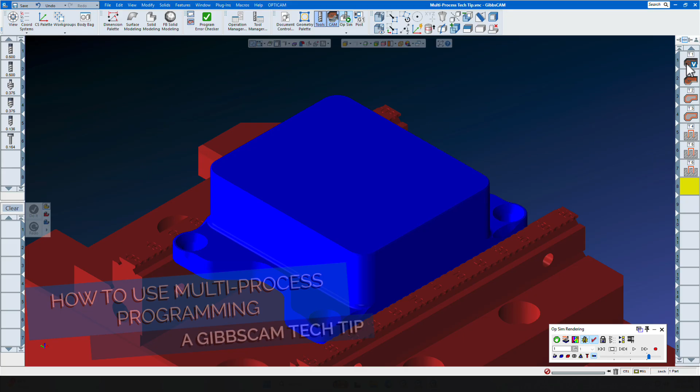In this GibbsCAM Tech Tip, we will show you how to use multi-process programming to instantly apply multiple processes to shared part geometry. It can be a time saver by only having to select the part geometry once for multiple processes. Save the processes to your library for quick recall to other part files with only minimal changes required. Let's show you how this works step by step.

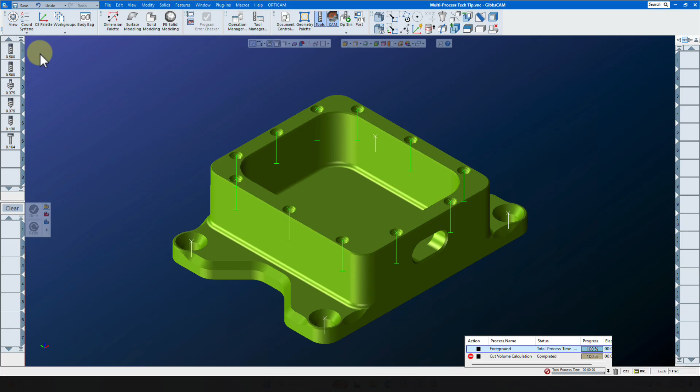We will start with an empty operation list and an empty process list, but we will stick with the tools since that's a very simple matter. Let's have a look at the tools that we're going to be using for this operation set. Number one, a 1/2 inch rougher, then a 1/2 inch finisher, a chamfer mill for the deburring. Next, we will use a spot drill, a number 29 drill, and an 832 spiral flute tap for these blind holes. Let's start by developing a volume mill process for the pocket.

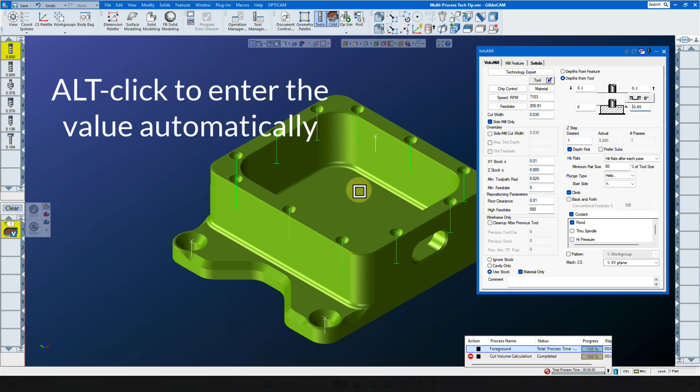Clicking on volume mill, let's check our parameters, and the bottom of our pocket needs to be called out here at -0.85. Notice that is a double click, alt click on the bottom of the pocket. We're going to leave 10 thousandths of XY stock, 5 thousandths of Z stock. Next, let's bring the semi-finish cutter down and finish only the floors with a roughing process set to offset with cleanup. Same depth. Pocket stock will be 10 thousandths. Floor stock or Z stock will be 0.

Next, a 1/2 inch cutter with a contour to finish the inner wall. We have our RPM and our feed rate. Our depth is set. Our lead in, lead out. Our stock will be 0. Cutter compensation is on. Lastly, for this operation set, we will select the chamfer mill and a contour. We will set the contour depth to -0.1 and the chamfer width to -0.025. That's the width of the chamfer here on the top of the part. All 4 processes are now ready.

We only need to supply some geometry. We'll use the profiler, select the geometry, and click Do It. Notice that we have the process manager open down here in the corner because it takes a few extra seconds to process all of these at one time. And you get to see the progress meter telling you how long it's been running and what percentage of progress it's making in developing these 4 tool paths together.

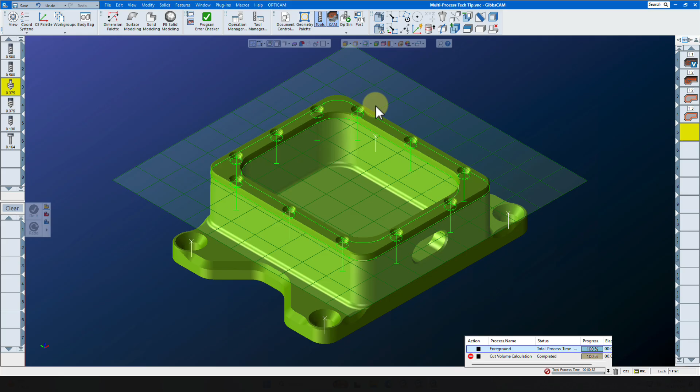We've used the hole manager to single out the holes. Let's start with the spot drill and go directly to a holes process. Our feed and speed set for this material, 4140, is there in the database. We will be using the hole manager for automated drilling. Our R level, our top of hole, this will be a chamfer, and yes, we want to adjust for the tool tip. The next process that we will build is the number 29 drill, still with a holes process,

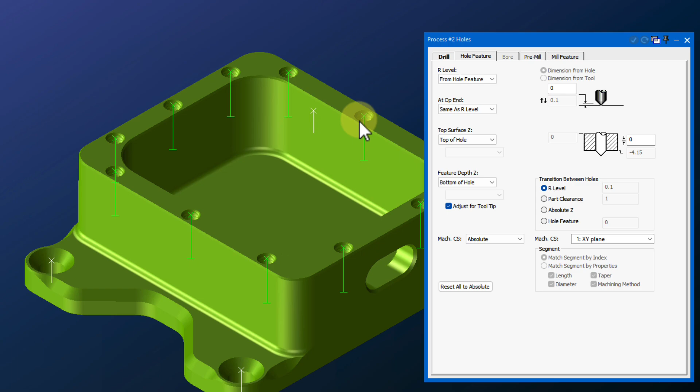and then peck chip break. Our hole feature needs one change. We will change this to bottom of hole for feature depth Z. When you select this, it automatically senses where the bottom of the hole is. Even if all of these holes were at different levels, this one operation will drill them all at their corresponding depths.

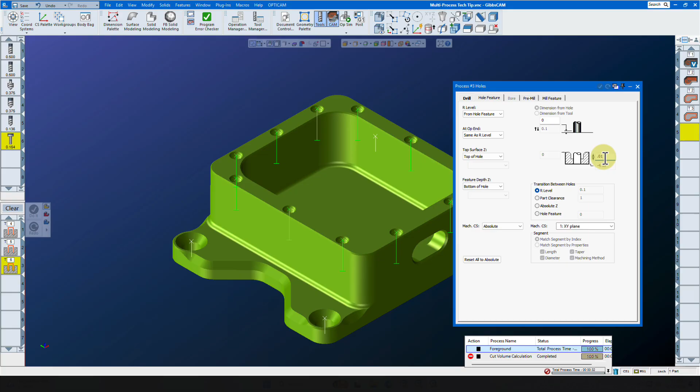Lastly, we have an 832 tap, which we will set to rigid tap and an RPM of 400. And our hole manager will make one change there. Bottom of hole plus 100. So we want to stay 100 off the bottom of the hole. There are 9 holes in this part. If there were 90 or 900, there would be no additional clicks. We simply click one hole feature, right click, select the whole group, and click Do It.

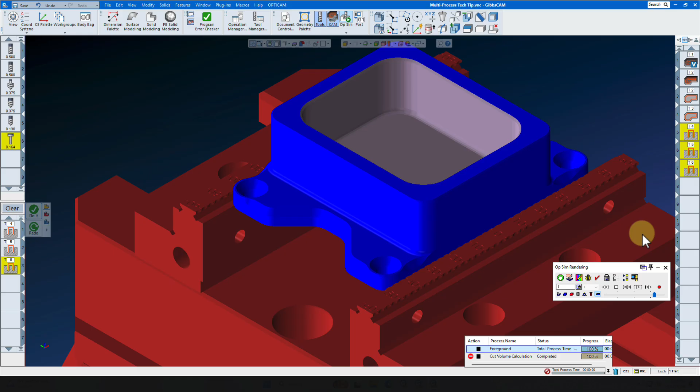We now again have all of the operations done, and if we watch them run in the OpSim, again, you will see that they are all linked together, and when you double click one set, that entire set gets reloaded onto the process list, where you can make modifications and click redo even while the simulation is running.

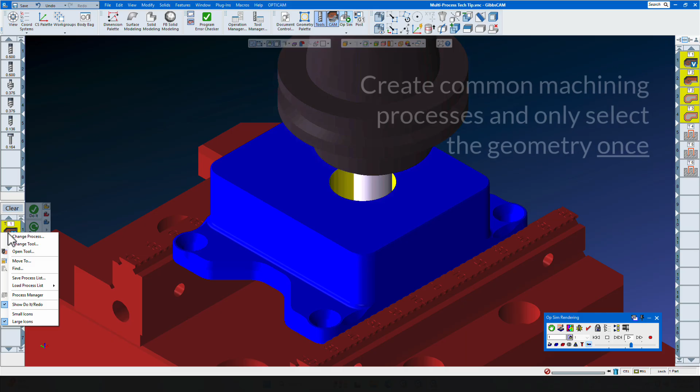Let's review some of the fine points of multi-process programming in GibbsCAM. Multi-process programming allows you to define multiple tiles in the process list and apply them to the same geometry. You can create commonly used processes and only select the machining geometry once. These combined processes may be saved, recalled quickly, and applied to a new feature on the same part or in another GibbsCAM session altogether.

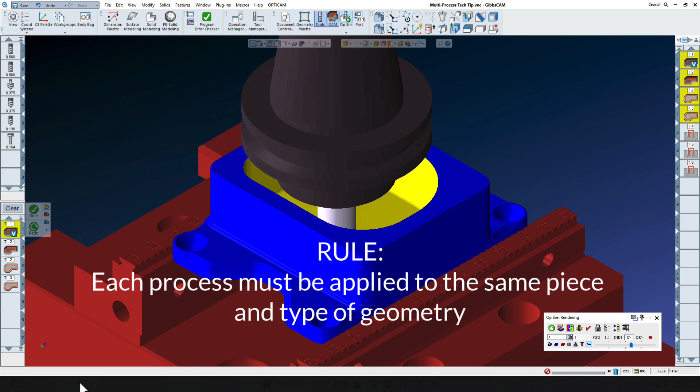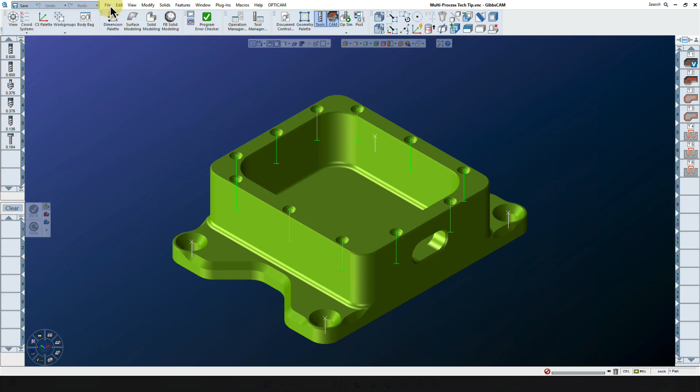Multi-process tiles are as easy to set up as single process tiles and require no extra steps. Rule 1 is that each process must be applied to the same piece and type of geometry. Example, drilling and pocket roughing may not be created together. Multiple features may be programmed at the same time as long as they are applied to the same piece and type of geometry. Now that this multi-process part is complete, let's move on to a totally different part file with 2 different pocket features in it.

The depth of the pocket is a little bit different, so we will update those when we bring in the processes. Notice that the tool list is empty, the process list is empty, and the operation list is empty. We saved those earlier, and now we can simply reload them with a click. Update the pocket floors with a double click and an alt click on the pocket floor. Same for this one, for the floor finish, and the same for the contour wall finish. The deburr pass does not need to be updated because its depths and widths are correct.

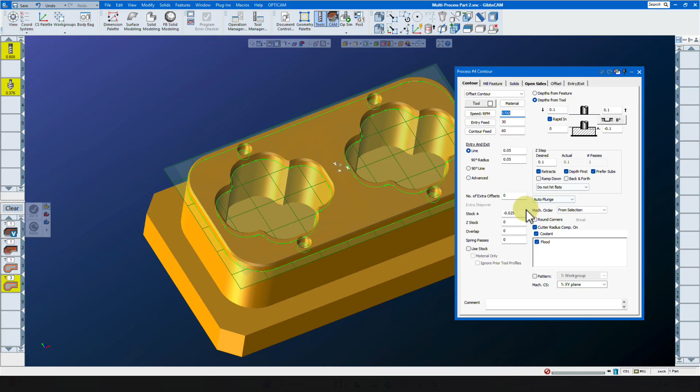Using our control key, we will select both pieces of pocket geometry and hit the Do It button only once and create 7 brand new operations on a completely different part. Use multi-process programming to streamline and shorten your programming time.